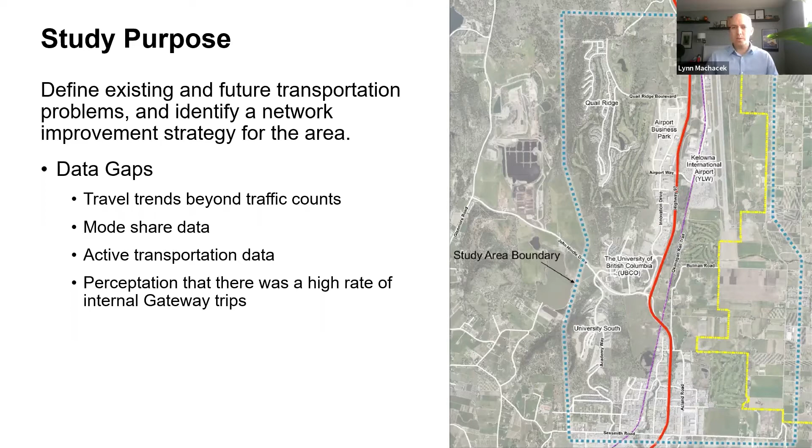And so in developing our study, there were a number of data gaps we needed to fill, and included in those were travel trends beyond existing intersection traffic counts and link traffic counts. We were also interested in mode share data for the area and active transportation data. And we were interested in understanding what travel generally was like within the Gateway. There was a perception that there was a high rate of internal trips within the Gateway, just because of some of the major regional destinations, such as the university and airport, and we were interested in exploring and validating those through our study. And that's where StreetLight came in.

Our team knew about it and were interested in trying it out with this project. It was the first time that we used it. And so we worked with the StreetLight team and our own project team and the City of Kelowna and other stakeholders to come up with a 10-zone study area. So the zones are origin destinations, and we have them shown here. They're essentially made of conglomerated traffic zones from the regional transportation model.

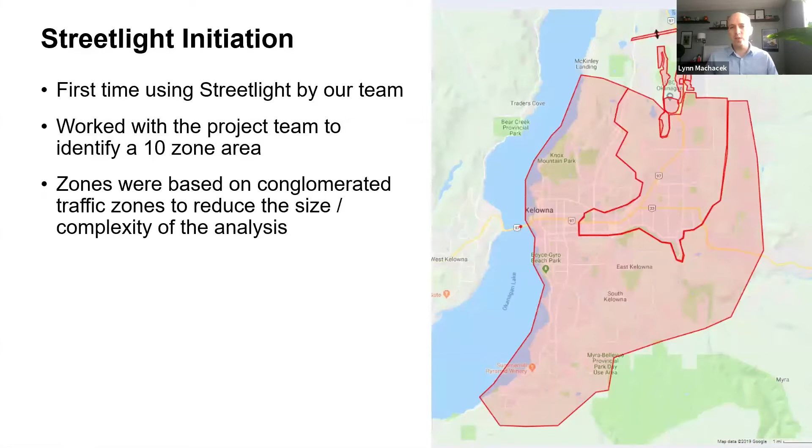And you'll see two different types. There's bigger zone blobs, and those are areas. And there's also screen line zones that capture all trips that cross the screen line. And so this was our basic zone structure. You'll see we have 6 zones up here in the Gateway area. And then we had 4 zones outside of the Gateway area, which were essentially external zones from our study area.

Zooming in, here are the 6 zones that we assigned within the Gateway. Quail Ridge and University South were residential areas on the west side of the study area. Here's UBCO in orange. Here's the airport terminal and parking zone, and then some surrounding airport industrial areas on the other side of Highway 97.

So when we started the project, we developed an outline of how we were going to use the data in the interface. And we decided that there were 2 primary purposes that we had for the StreetLight data. One was the origin destination data and matrices, which we used to understand the current travel trends in the Gateway and also to calibrate the travel demand model that we were using for the project. For this project, we used the regional travel demand model and a subset of it, and we used the data from StreetLight to calibrate that.

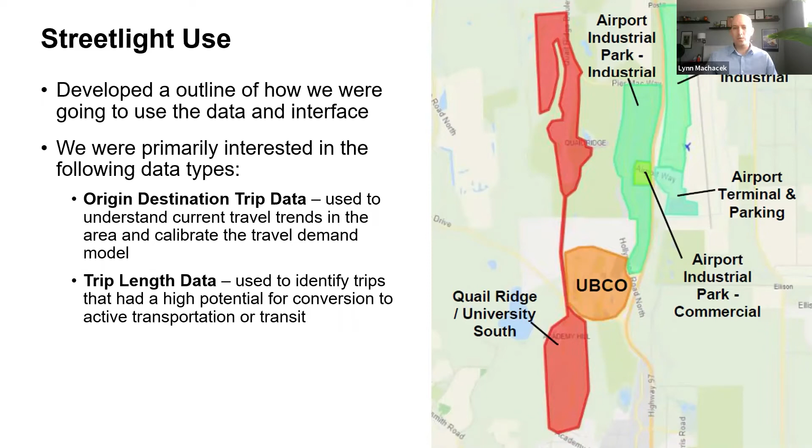But we also used the StreetLight platform and the information on there, including the visuals and the graphics, to get a good understanding of what trips were like in the Gateway without having to crunch many numbers. And that includes data like trip length data, which was readily available and easily understood. So here's a screenshot of what the StreetLight interface looked like online. This is a sample for 6 zones within the Gateway, so effectively internal trips within the Gateway.

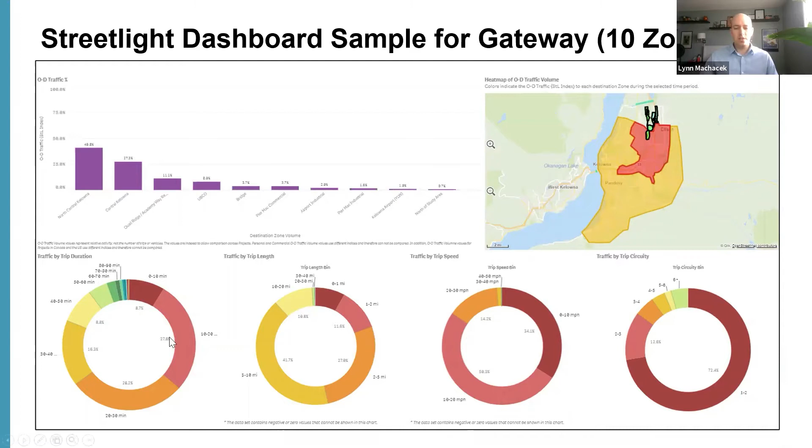You can see the heat map on the right shows which locations have the highest number of trip ends. There's also a chart on the left that shows percentages, and there's a number of pie charts on the bottom that show more detailed information, such as trip duration, so how long trips take, categorized into 10-minute bins. Then there's trip lengths, trip speeds, and trip circuity. We were also able to easily expand that into the 10 zones that we had selected and got the same indicators, but with different results, obviously.

And what this interface allowed us to do was easily compare internal trips versus all trips to the Gateway, which is represented by our 6-zone analysis up here and 10-zone analysis down here. You might not be able to read the numbers from here, but I can explain them. So this is the 10-minute bin of total trip duration, and this is the 10 to 20-minute bin. So what we're easily able to see here is that the majority of internal trips within the Gateway are less than 20 minutes.

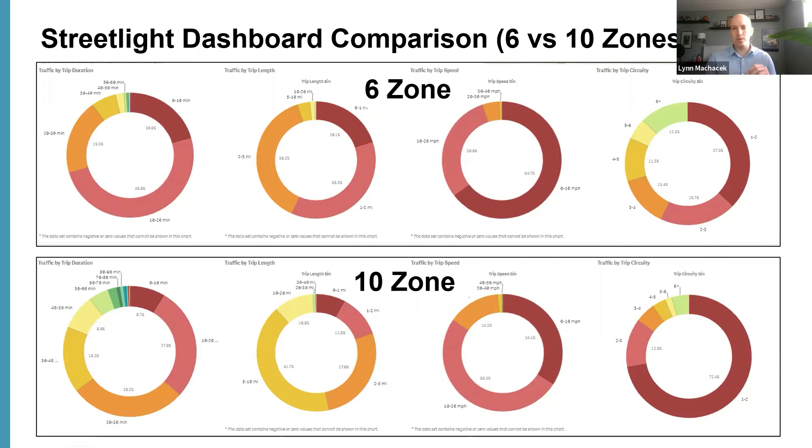Whereas if you look within all of Kelowna, trip lengths are longer, trip distances are longer, and trip speeds are also higher. So the interface enabled us to easily understand this and get a sense of what travel was like within the gateway compared to overall trips in the city of Kelowna.

So here's a summary of some of the key findings that we found through investigating the data on the Streetlight interface. One was that 5% of captured trips within the 10 zones that we analyzed had a trip end within the gateway. So, that's 1 in 20 trips in the city of Kelowna begin or end within the gateway. 25% of all trips with an end in the gateway were internal. That means that 75% of trips to and from the gateway were external trips.

Nearly half of all trips to the gateway were less than 8 kilometers long or 20 minutes. Now, those of you who are active transportation and transit planners know that those values are definitely within the range where those trips could be accommodated by cycling and transit.

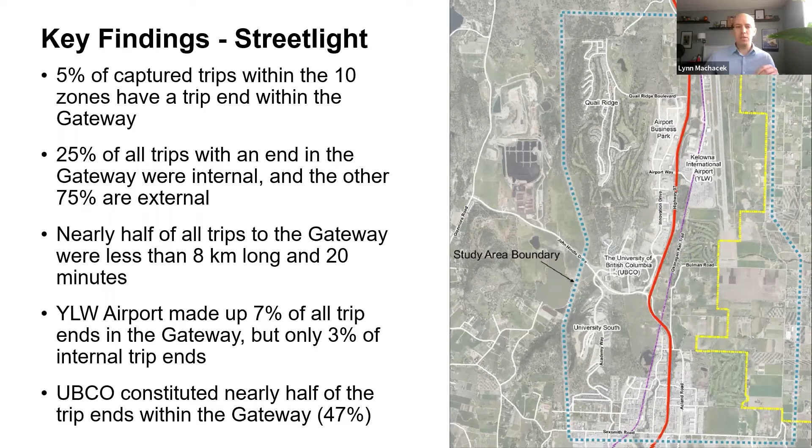We also found out that the airport made up 7% of all trip ends within the gateway, but only 3% of internal trips. So this identified that the airport wasn't, in fact, a major destination within the gateway for internal trips, but it was more important from a regional context, which isn't necessarily surprising because there's only one major airport in the region. So it makes sense that the majority of trips come from outside of the gateway to the airport. And finally, UBC Okanagan constituted nearly half of the trip ends in the gateway at 47%. So we knew that that was going to be an important consideration in our study moving forward.

The other part of our study, in addition to analyzing traffic and travel trends, was identifying existing and future problems. And this is a really high-level summary of what we identified. One was highway access to the Kelowna International Airport. There's only 2 accesses to the airport, one here and one up here, and really only one major one at Airport Way. It currently experiences congestion and queuing issues, and those are just going to be exacerbated in the future as traffic grows without improvements.

Another one of the problem areas that we identified was access to UBCO. There's a number of vehicle access points, but their capacities are limited, and we flagged that as a future issue. And then also down here, Sexsmith Road is the southern boundary of the study area, and in the past it's experienced high collision rates and congestion. The ministry did make some improvements along Highway 97 recently, but it was uncertain in our study how much those had changed, so we flagged that as a problem area.

And then the last problem area that we identified, or overall problem area, was internal gateway travel. As you can see here, the number of road connections and active transportation connections are somewhat sparse, and that's due to the geography and the physical characteristics. So in some cases, there's not roads and active transportation connections linking all of the major locations, and that can lead to the circuitous trips that we observed from the Streetlight Index.

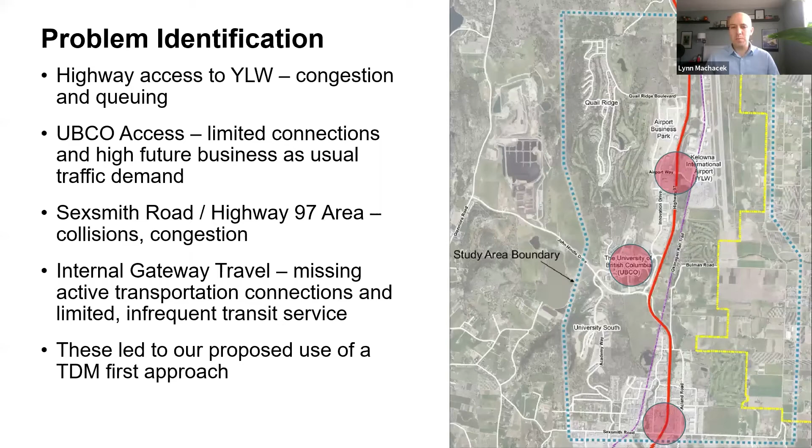So considering the travel trends and these identified problems, this led us towards what we called a TDM first approach. So instead of simply modeling the future characteristics and then addressing them with traffic capacity improvements, our approach instead was to try to change future vehicle trips to active transportation and transit trips, knowing though that that's typically a more cost-effective method. And we used Streetlight to help us progress with that approach.

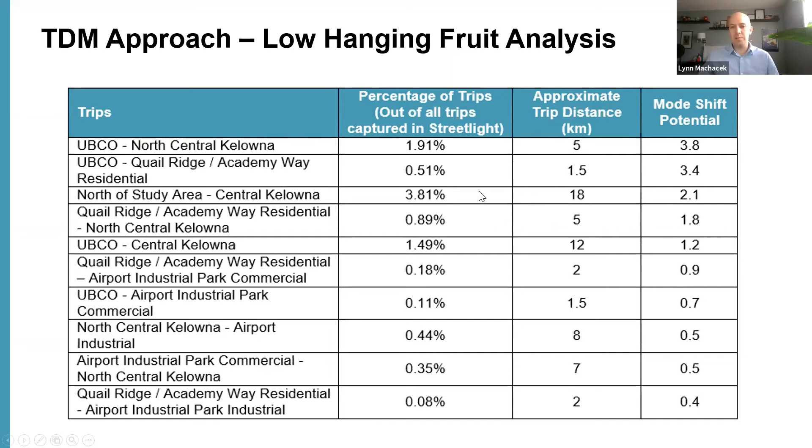So using this, we were able to identify the areas that would have the best bang for our buck in terms of improving active transportation and transit connections and getting the highest amount of mode shift within the gateway as a result. Some of the findings from this analysis were that UBCO was listed as one of the trip ends for 4 out of the top 10 low-hanging trips. And the airport was only listed once, and that was the airport industrial park. So this really helped us focus our efforts on identifying where we needed the most improvements in the gateway.

So from that approach, we ended up recommending a number of TDM improvements that included recommending increases to transit service to the airport. There is transit service today, but it's not very frequent. We also recommended significantly increasing transit service to UBCO, and that's to accommodate future growth that's projected at the university.

But at the same time, the university is not projecting that they'll increase their parking supply very much, and so transit will really have to make up the difference there. We also recommended active transportation connections between UBCO. Right now, there's an informal pathway here connecting this residential area of Quail Ridge and the university. We recommended formalizing that and improving it.

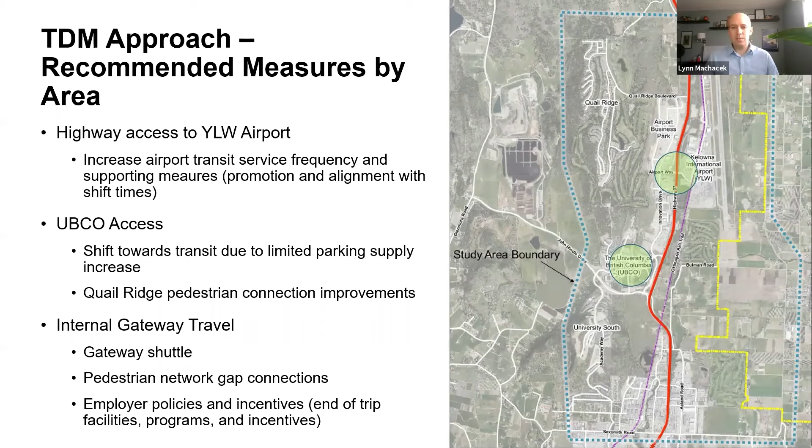And then we also recommended a shuttle in the gateway to connect some of the major destinations, a number of other minor pedestrian gap fixes where there's currently no sidewalks or pathway. And then we recommended that the university and the airport and other businesses consider employee incentives, such as end-of-trip facilities, programs, things like that, to increase the attractiveness of active transportation and transit.

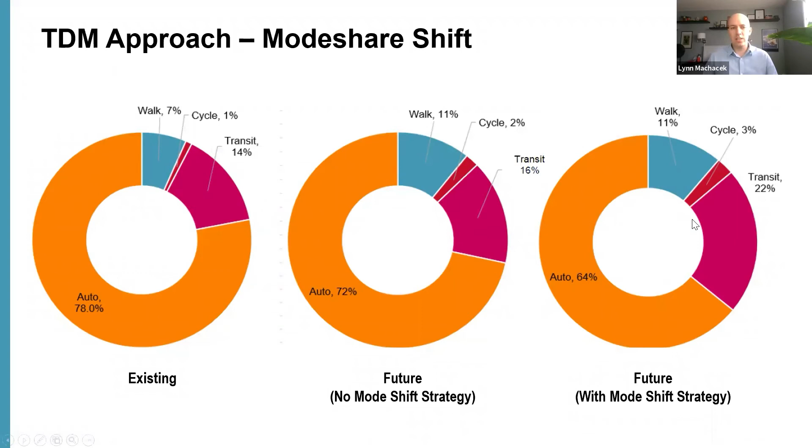Here's that same data shown another way. Today there's 78% auto mode share in the gateway. In the future baseline scenario, we predict that would go down to 72. And with our mode shift strategy, we predict that would go down to 64 with transit, walking, and cycling increasing respectively.

So following from that, here is the slide that shows our final project recommendations. So we recommended that the final recommendations be implemented in 4 different phases, phase 1 being short-term and phase 4 being long-term. The initial phases focus on access management along the highway, and then the next phases focus on increasing network connections.

One of the flagship improvements of this project is this green connection right here. It is currently a northbound left turn off-ramp off the highway that provides access to UBCO. However, the ramp and bridge is about 8 or 9 meters wide, definitely wide enough to accommodate two-way travel, although it's just a one-way bridge right now. And so what we propose to do is add a second eastbound lane on that bridge, which will enable two-way travel. And then to add this road here that's long been contemplated, called the Rutland Connection.

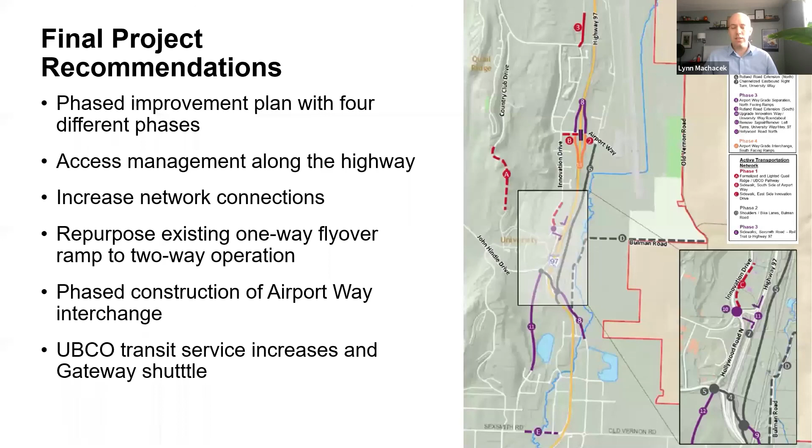So moving back to Streetlight then, what Streetlight enabled us to do on this project was cost effectively collect origin-destination data, which had a number of other complementary metrics, like Peter was mentioning, such as trip distances, demographic information. And we were able to do that quickly, efficiently, and in a much more cost-effective manner than something like an older data collection method, such as license plate surveys.

Streetlight's easy-to-use interface also enabled us to identify low-hanging trips quite early on in the study, which helped direct the study, and we weren't waiting for data. We were able to move ahead with certain parts of the study quite easily and quickly. And finally, the Streetlight interface makes it very easy, once you have your zones uploaded, to change the date and time of the data that you're looking at. So you can kind of explore different options and travel trends based on what you find as you go with the data.